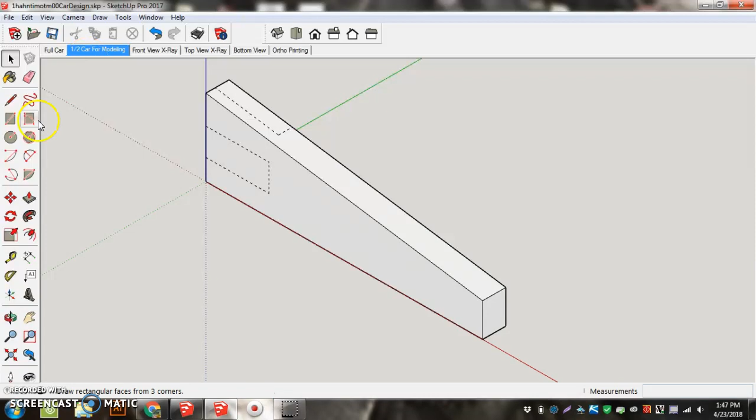So we got the car cut to length. Our next step is to take care of the axle holes. I'm going to first go to car for modeling, go to front view again. I don't have a dotted line, so I need to right click and go edit component. Now I have the dotted line going around.

Now we have to set up axle holes. Anytime we're working with axle holes, we start out with the center, so we need to locate the center of our axle holes. Locational holes we need to make with the tape measure tool.

The first one we have to do is they are 7 millimeters off the bottom, so I'm going to click the bottom and bring it up and type 7 and hit enter, and it moves it to 7.

Then from the front and the back of the car, it is between 9, so like right there, and 50, which is about here. You have to determine where you want that axle hole, because remember, you cannot cut underneath the axle hole, so if you're going to try to taper this back up for some aerodynamic effect, you want to put this a little bit further forward.

If you're going to try to do a swoop out of the bottom to get rid of as much weight for Newton's second law, you might want to move it a little bit back further. I am going to set mine about right here in that 45 area.

Then my front one, I have to think, am I going to curl that front over? What am I going to do with that? Or am I going to point it? What do I want to do there? So this one's a little bit trickier.

We're not using an axis to click on. I want to click on this edge, bring it back, anywhere between 9 and 50 again. So I kind of want to round that front over a little bit, so I'm going to move back a little bit, but I don't want to go too far. So I want to go 20.

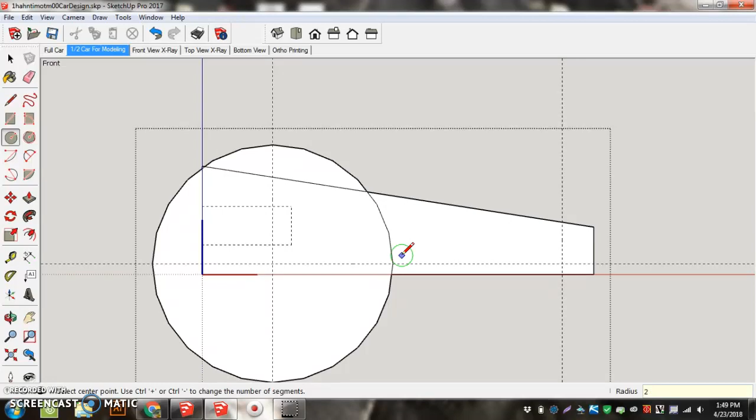I am clicking on the intersection here, and this one here, it's just good practice to get used to doing this. Take your pencil and run it down the guideline and just click it. It's gigantic. Now the radius of that axle hole is 2, so it's a diameter of 4. So we're going to type 2 and hit enter, and it's going to make it nice and small.

Now you might be thinking, well, that's a tiny wheel. We're not drawing a wheel. We're drawing the hole that the metal rod's going to go through that's going to hold the wheels. The wheels are going to be quite a bit bigger because they have to come down below your car a little bit.

So we drew the back axle hole, front axle hole, same thing. Click on the center, bring it way too big, keep it on the line, and type 2 and hit enter.

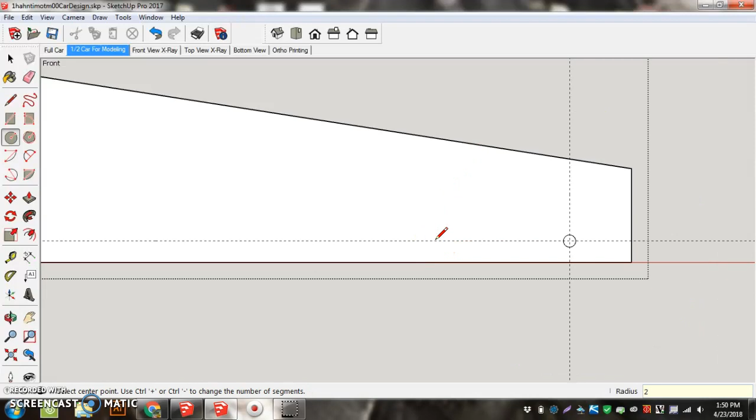Now I have my 2 axle holes, or the location, the beginning part. We're going to switch to doing some cutting with the push-pull tool. Well, I can't cut very well right now, so I have to go to ISO.

When I go to ISO, I'm going to grab this, zoom in, and then grab the center of the ISO, or axle hole. I can pull it out, I know I got the right thing. And if I accidentally drop it, it's okay. But what I want to try to do is get it to go all the way to the back. So when I accidentally dropped it there, I did hit Control-Z, or the undo button, to get that taken care of.

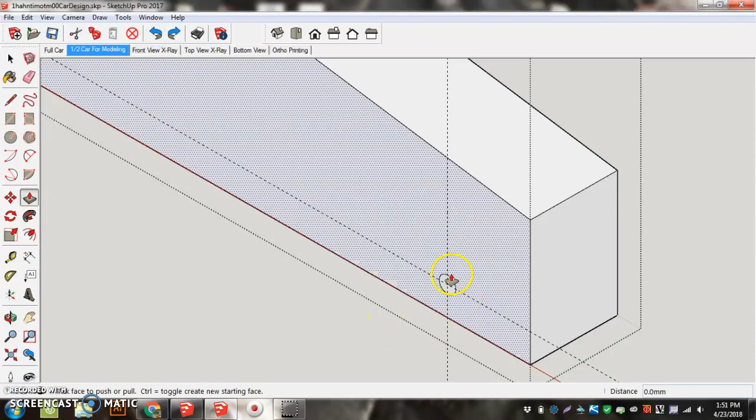Once in a while you grab the wrong thing and it's like, oh no, I don't want to do that. So you click undo. If I go to top view X-ray, I can now see that this tube goes all the way through, but this one doesn't.

So I'm going to go to isometric. I'll keep it on X-ray for this one so I can kind of see what's going on. It's a little bit messy. But I'm going to push-pull again, I'll show you what this looks like. So when I grab this, I push-pull. Now this one's really tricky because all of a sudden it gets really long.

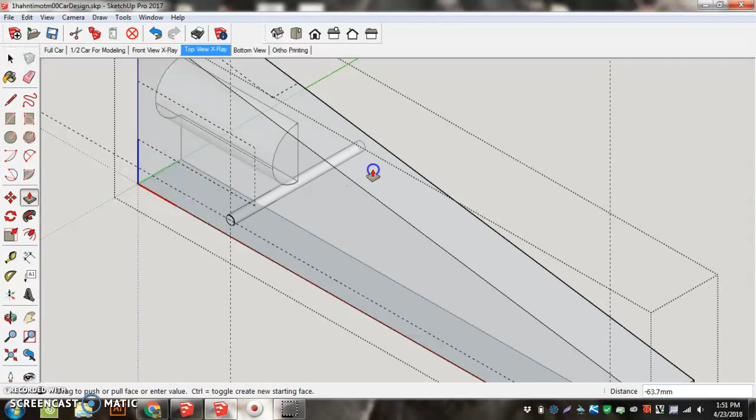I want to touch it to this back wall, so this is the back edge of my car, and it cuts it off to the right length. Then I have my 2 axle holes done. We're going to go to full car, save, because that's where we're at, and we're ready to move on to the next step.